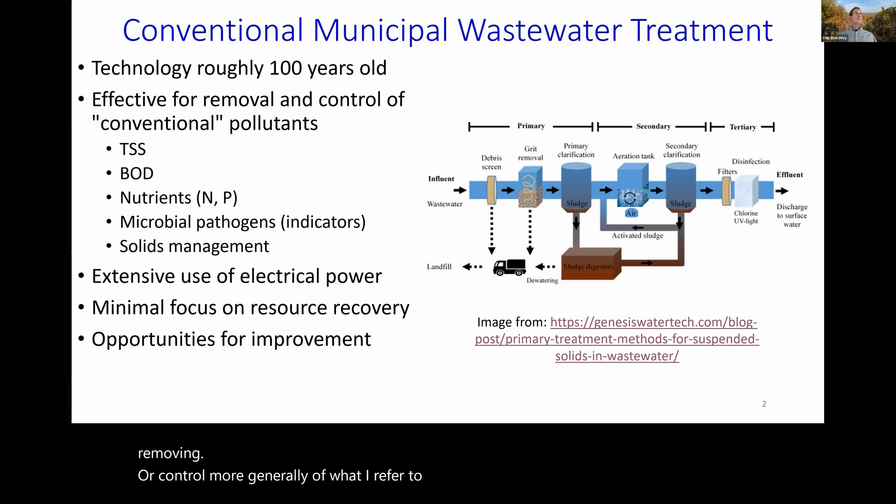Those include constituents that we quantify by total suspended solids or biochemical oxygen demand. They're also effective for control or removal of nutrients, especially nitrogen and phosphorus. They are effective for control of microbial pathogens, although we don't generally track pathogens, we track indicator organisms. And then lastly, if these systems are operated properly, they're effective for solids management. So these systems, as I said, are roughly a century old in terms of the technology that's used, and they are effective, as I've described.

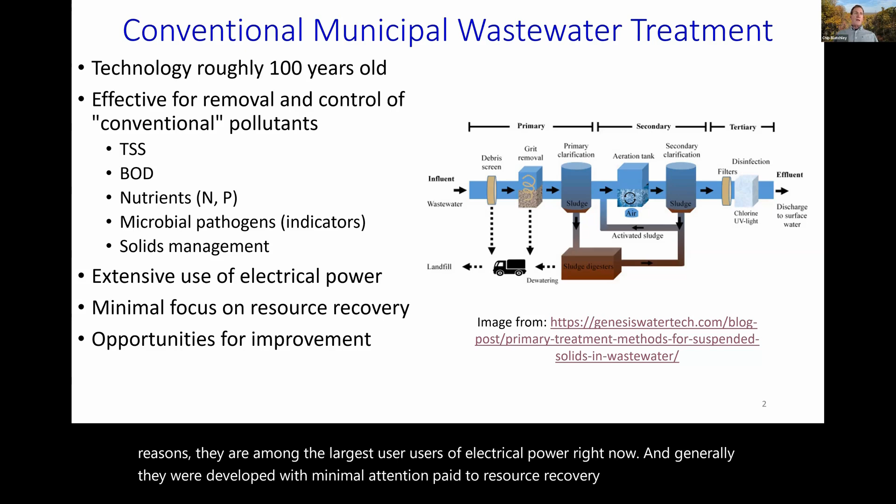However, they were developed at a time where focusing on electrical power consumption was really not a priority. And for that and other reasons, they are among the largest users of electrical power right now. And generally, they were developed with minimal attention paid to resource recovery, which suggests both of those things, that there's opportunities for improvement. So just in schematic form, this is really what we are looking forward to in terms of how these facilities are going to be operated in the future.

They will still have the requirements for control or removal of the conventional pollutants and perhaps others that I described on the previous slide, but they're going to be reconfigured to allow for a focus on resource recovery and reuse. And the resources where there are clear opportunities that can be taken advantage of here include energy. It is possible to develop these systems so that they are net positive in terms of energy rather than net negative. It's also possible to recover and reuse nutrients, especially nitrogen and phosphorus. But the focus of this presentation is going to be on recovery and reuse of water in a range of applications from irrigation all the way up to what's known as direct potabilization.

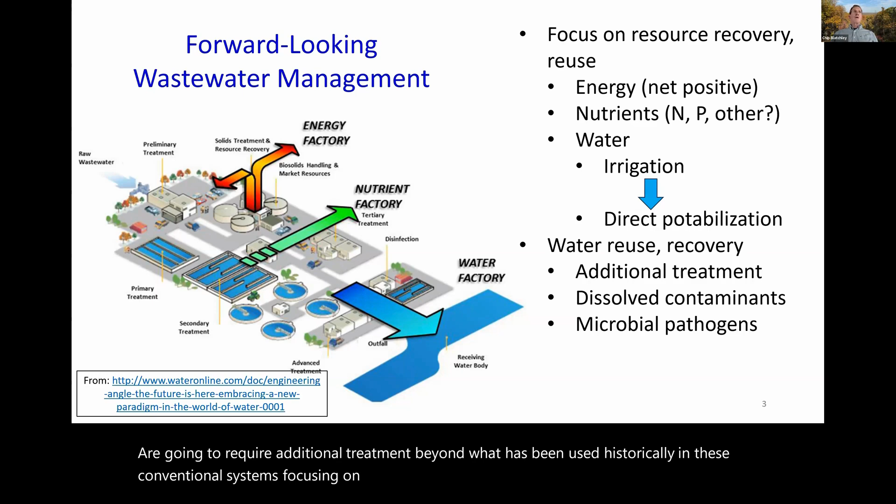So the water reuse and recovery opportunities are going to require additional treatment beyond what has been used historically in these conventional systems, focusing on dissolved contaminants largely and microbial pathogens. So the endpoint for treatment in almost all of these settings is going to be governed by some set of regulations. Somebody's going to tell you what you must do in terms of treating this water. So as an example, I've illustrated some of the requirements that are stipulated in Title 22 in California, which dictates how wastewater reuse is practiced in California.

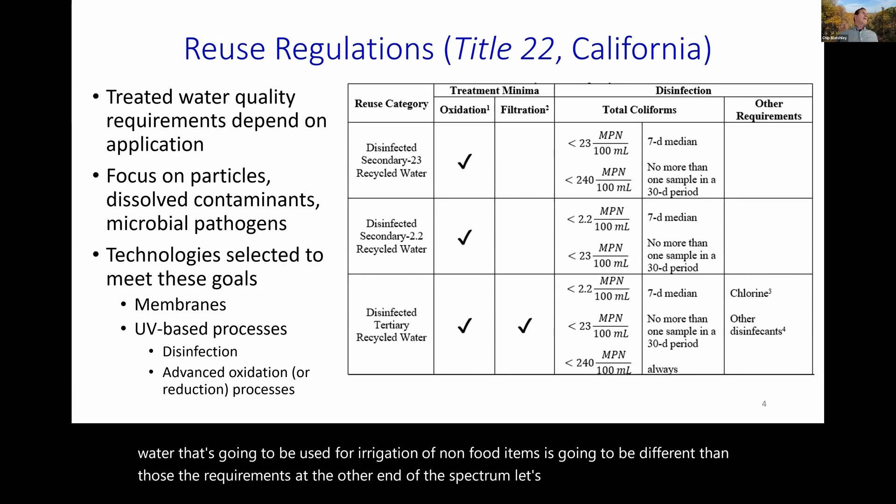So the treated water requirements are going to depend on the application. The requirements for water that's going to be used for irrigation of non-food items is going to be different than the requirements at the other end of the spectrum, let's say for direct potabilization. The focus of these requirements, as illustrated in this table, is on particles, dissolved contaminants, and microbial pathogens. And that's addressed, for example, in this column by the requirement for oxidation, which basically means the use of a biochemical process like activated sludge or something similar to address the dissolved constituents that are oxidizable.

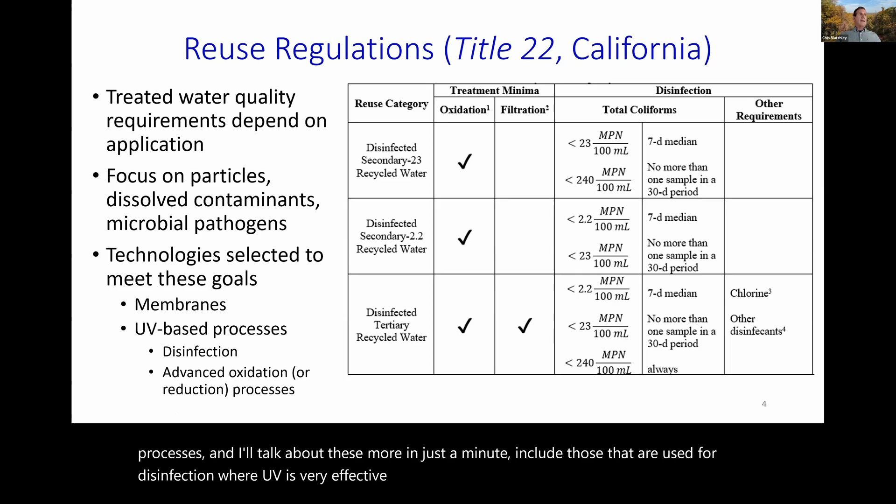There's also a requirement for solid separation in some of these settings, and that's defined in this filtration column. The last row in this column represents, at least in this table, the most severe requirements. And those would be the requirements applicable where the water has a larger likelihood of having human contact, either directly or indirectly. The technologies that are often, although not always, selected to meet these goals include membrane-based processes and UV-based processes. The UV-based processes, and I'll talk about these more in just a minute, include those that are used for disinfection, where UV is very effective, but also for advanced oxidation or advanced reduction processes.

Focusing specifically on ultraviolet disinfection, which is commonly used. Again, the extent of treatment or the amount of UV that needs to be used in a given setting depends on the intended use.

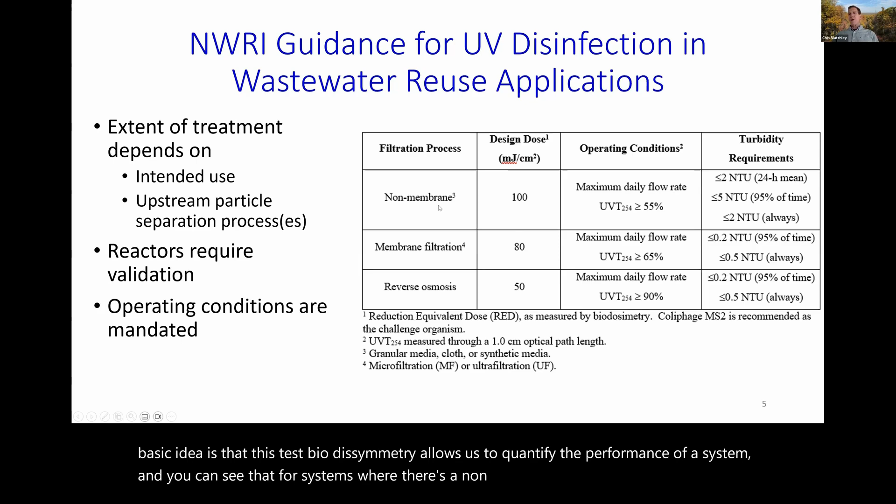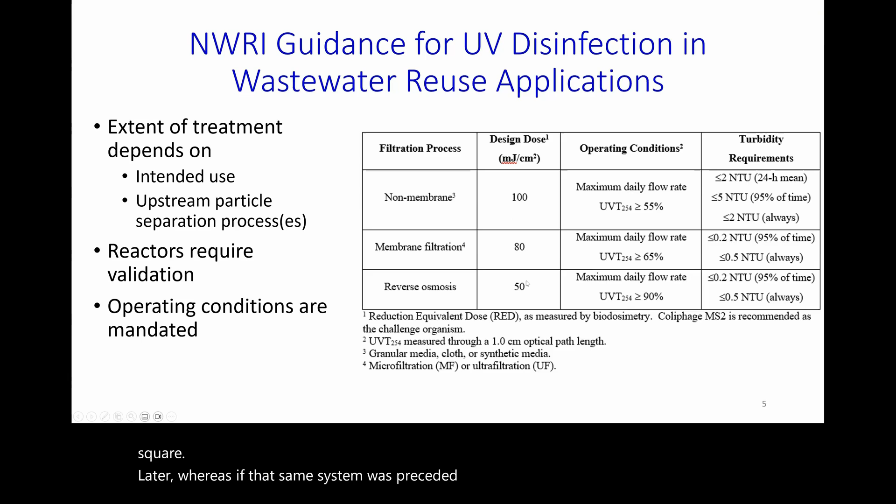You can see that for systems where there's a non-membrane filtration process, probably something like a sand filter that precedes it, the design dose would be 100 millijoules per square centimeter. Whereas if that same system was preceded by reverse osmosis, the requirement would be only 50 millijoules per square centimeter, roughly half.

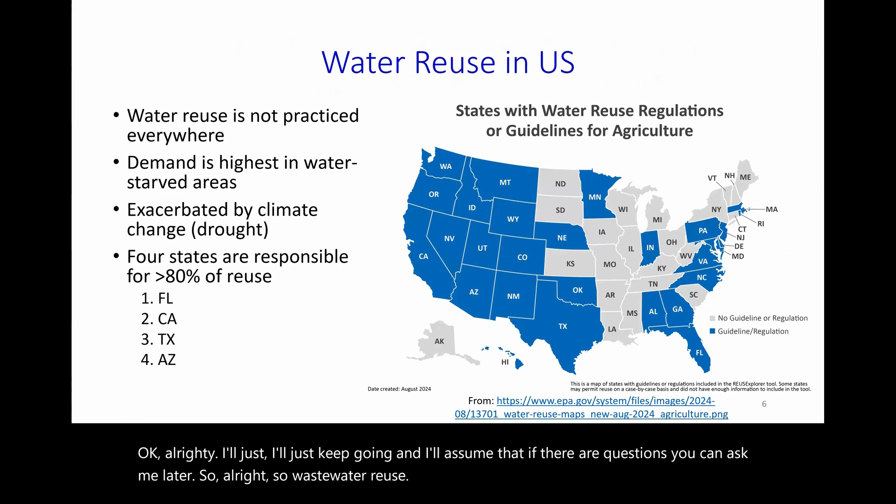Okay, thank you. So wastewater reuse is practiced broadly in the United States, although not all states are currently involved in wastewater reuse. The demand is, not surprisingly, highest in the water-starved areas of the country, and that demand has been exacerbated by climate change and in particular drought.

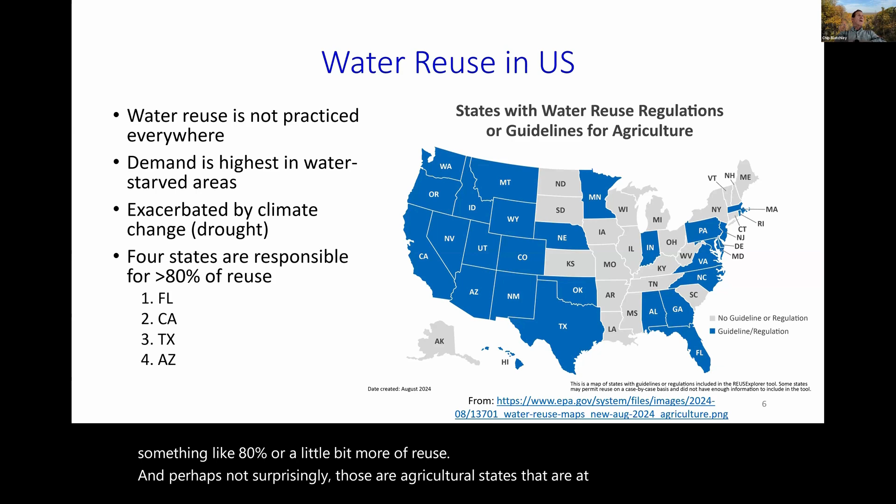Among the 50 states, there are 4 that are responsible for something like 80% or a little bit more of reuse. Perhaps not surprisingly, those are agricultural states that are, at least at times, water-starved, including Florida, California, Texas, and Arizona.

So I want to talk about a couple examples of wastewater reuse. This is a fairly extreme example that was implemented about 8 or 10 years ago in Wichita Falls, Texas. They experienced an extended drought that motivated them to pursue alternative sources of water. One of the most reliable sources of water, at least in terms of quantity, is wastewater.

So what they did was they implemented this pipeline, illustrated in the photo on the left, that transports their treated wastewater from their wastewater treatment facility to this other treatment facility, illustrated over here on the right, that includes membrane-based processes and UV-based processes.

That water is then discharged to a reservoir. That reservoir is the supply of water that's used for their potable water production facility. So that's an example of indirect potabilization, where they're basically augmenting an existing water supply with wastewater that's been treated to meet requirements that are stipulated and defined as being acceptable in the state of Texas.

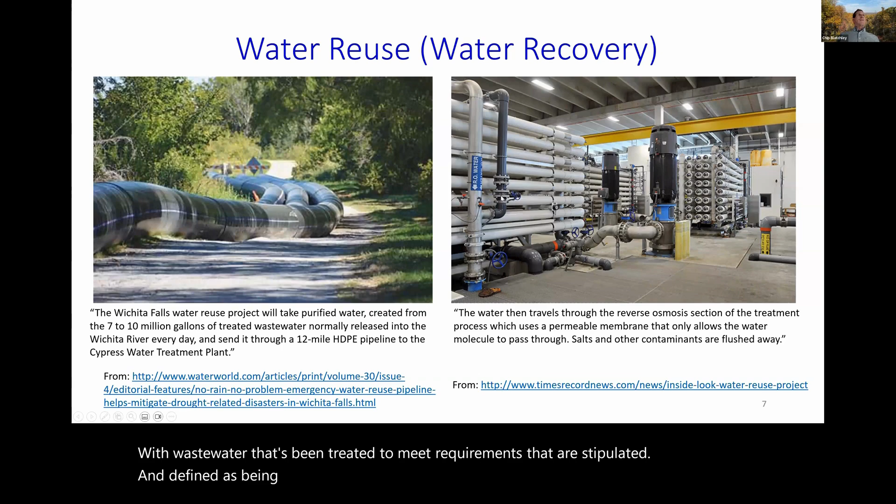In California, more recently, they have implemented direct potabilization. Direct potabilization is where a facility would treat wastewater, starting with wastewater and treating it to the point where the treated water could be directly injected into the water supply system.

This was motivated by an extended period of drought, especially in California but more broadly in the Southwest. Also, California and other water-starved states are experiencing increasing urbanization, with growing urban populations, as well as substantial demands for water use in agricultural settings. So the need exists to rely on water supplies that were previously viewed as unacceptable.

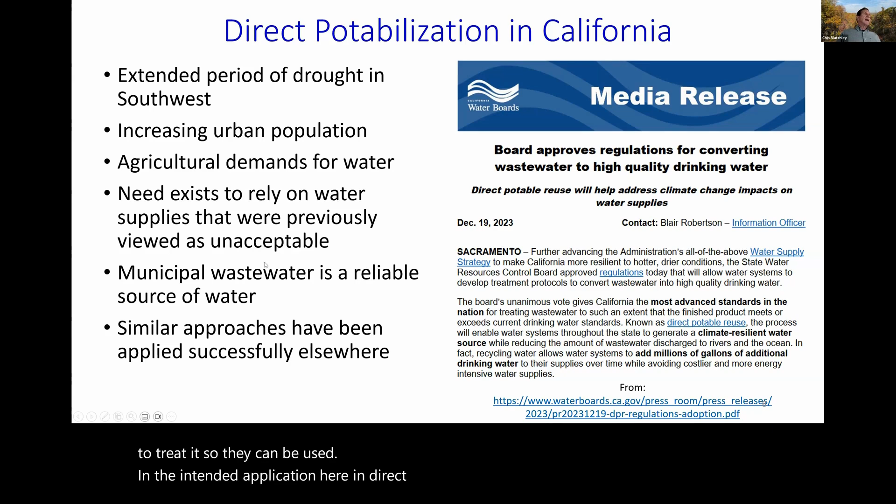Among those is wastewater. Municipal wastewater represents a reliable source of water, and the trick is to treat it so it can be used in the intended application here, direct potabilization. This is not unique to California; similar approaches have been applied successfully elsewhere.

Briefly, the membrane-based processes are described on this slide in schematic form. There's a range of pore size openings in the various membranes used in these settings, and a variety of separation mechanisms ranging from size exclusion to electrostatic separation. The basic idea is that these processes, depending on the membrane selected, can allow for very effective physical separation of large molecules and microorganisms.

Generally, these systems precede a disinfection system like UV. This image in the lower left illustrates the ability of various membranes to separate constituents from water.

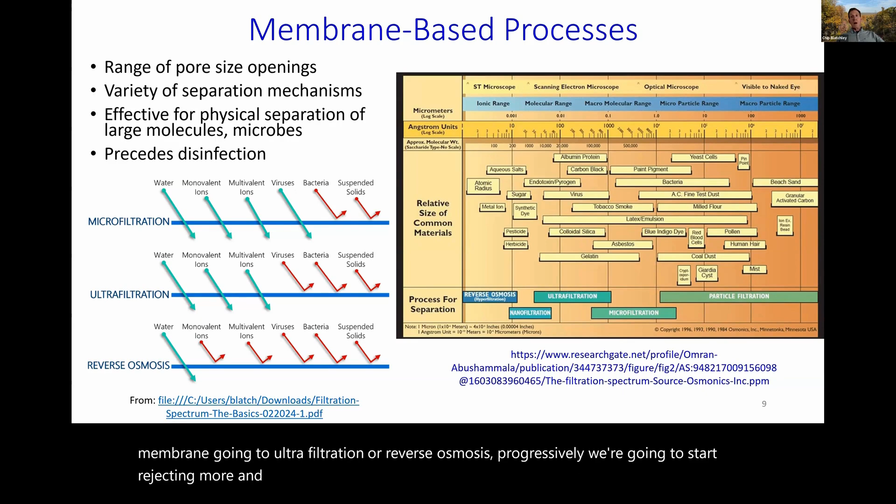A microfiltration membrane is relatively loose. It will allow for rejection of bacteria and suspended solids, but smaller particles like viruses or ions present in the system will pass through. If we tighten up the membrane going to ultrafiltration or reverse osmosis, progressively we start rejecting more and smaller constituents present in the water supply.

Disinfection requirements, like those for other forms of treatment, depend on the intended uses. Generally, the disinfection requirements become more stringent than those observed with conventional wastewater treatment, where you might be discharging the treated water to a receiving stream.

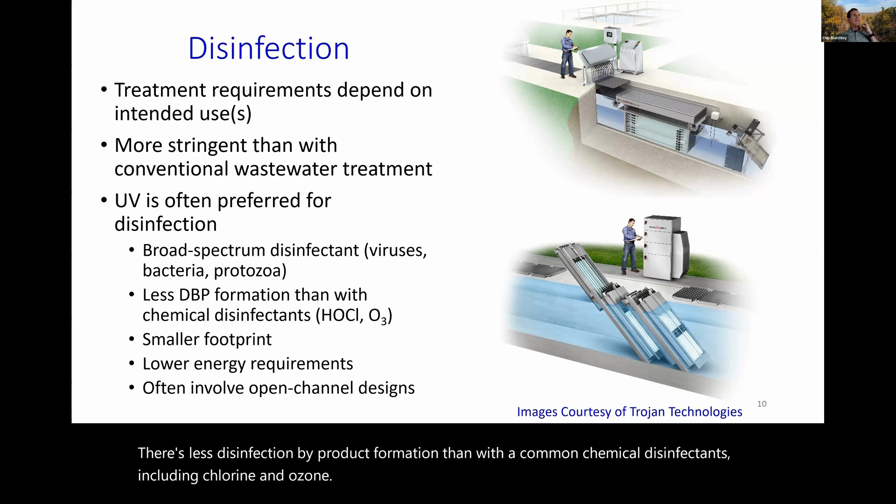For a number of reasons, UV is often the preferred mechanism for disinfection. It's a broad spectrum disinfectant, very effective against virtually all pathogens including viruses, bacteria, and protozoa. There's less disinfection byproduct formation than with common chemical disinfectants like chlorine and ozone. These systems have smaller footprints and lower energy requirements than chemical disinfection systems, and UV disinfection systems for wastewater treatment or reuse generally involve open channel designs, as illustrated in the images on the right.

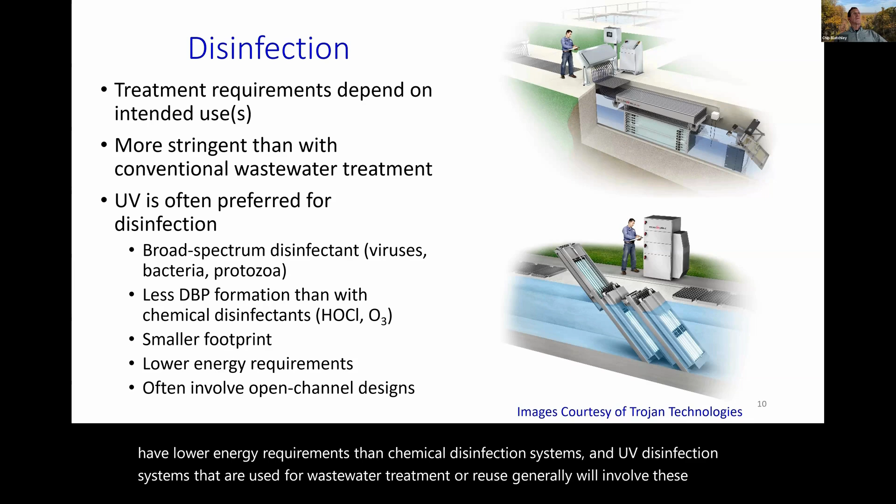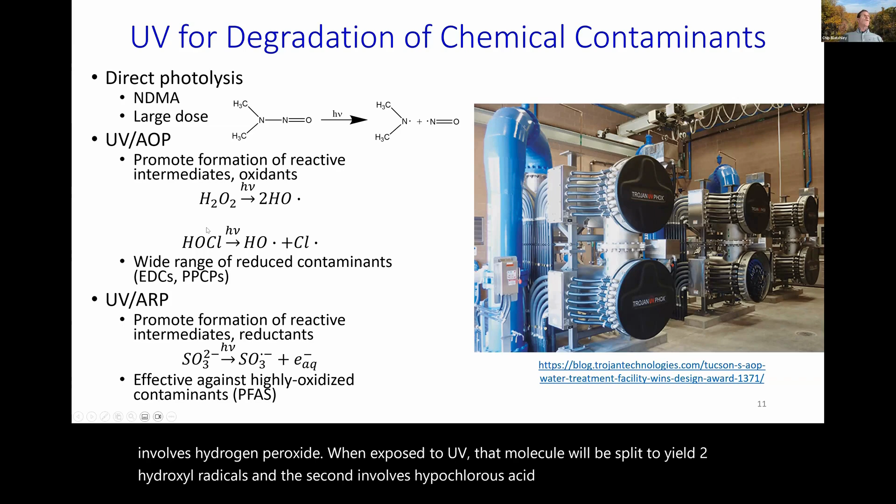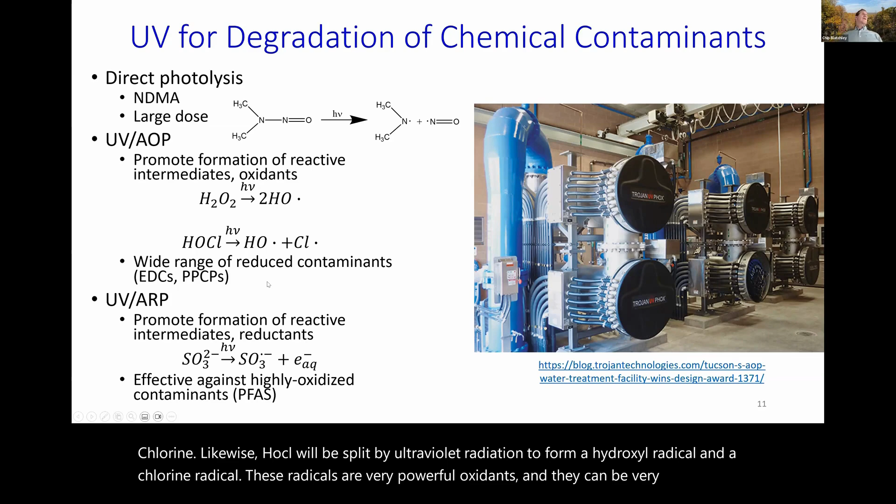UV can also be used to promote the formation of reactive intermediates, including reactive oxidants. Here I've illustrated two examples of UV advanced oxidation processes. The first involves hydrogen peroxide, which when exposed to UV is split to yield two hydroxyl radicals. The second involves hypochlorous acid, the most active form of chlorine; HOCl is split by ultraviolet radiation to form a hydroxyl radical and a chlorine radical. These radicals are very powerful oxidants and can be very effective for degradation of reduced contaminants, including endocrine disrupting compounds, pharmaceuticals, personal care products, and other constituents often of concern in wastewater reuse applications.

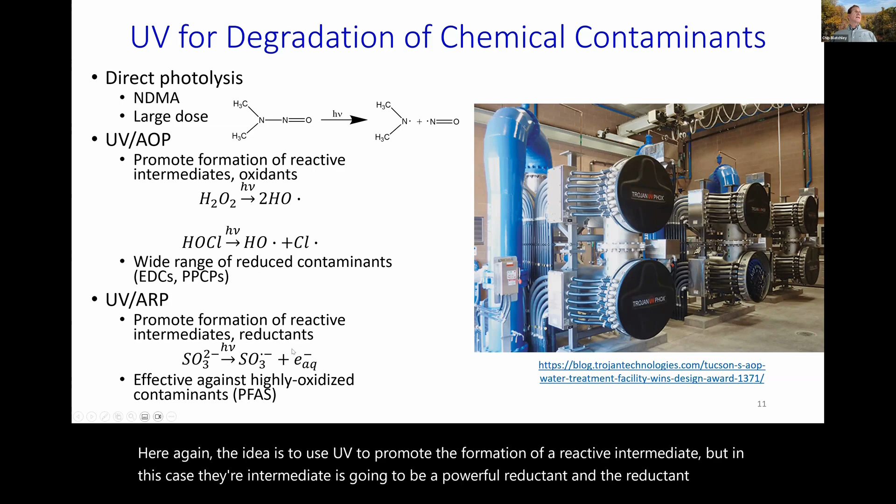Lastly, UV can also be used in what's known as an advanced reduction process. Here again the idea is to use UV to promote formation of a reactive intermediate, but in this case the intermediate is a powerful reductant. The reductant we specifically focus on in these ARP processes is the hydrated electron, the most powerful reducing agent, very effective against highly oxidized contaminants, notably including compounds in the category PFAS.

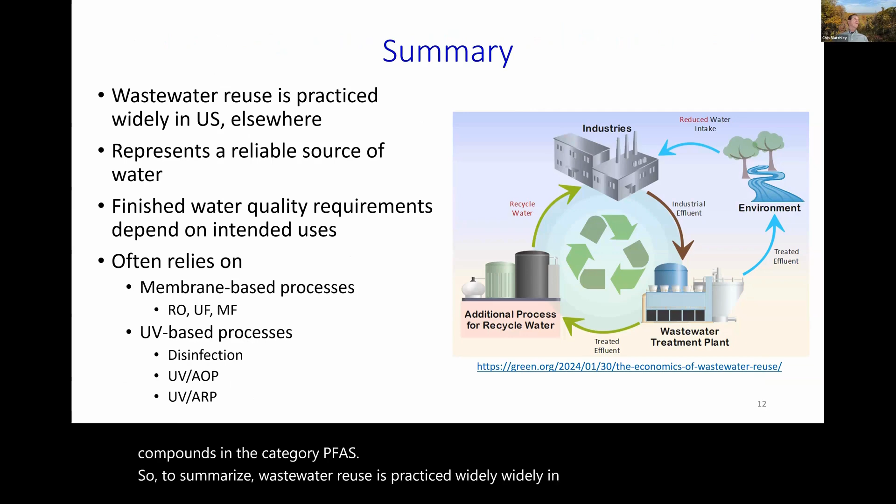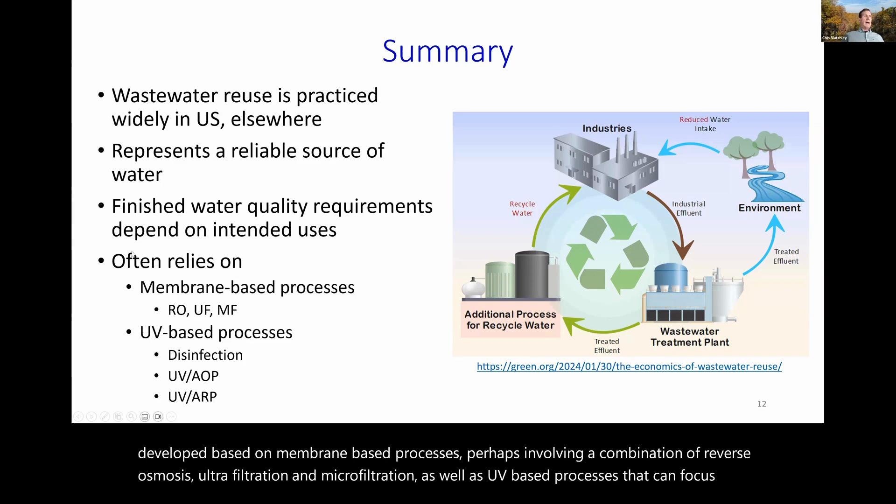To summarize, wastewater reuse is practiced widely in the United States and elsewhere. It represents a reliable source of water that can augment existing water supplies. The finished water quality requirements depend on the intended uses, and these systems are often developed based on membrane-based processes, perhaps involving a combination of reverse osmosis, ultrafiltration, and microfiltration, as well as UV-based processes that can focus on disinfection, oxidation, reduction, or a combination.

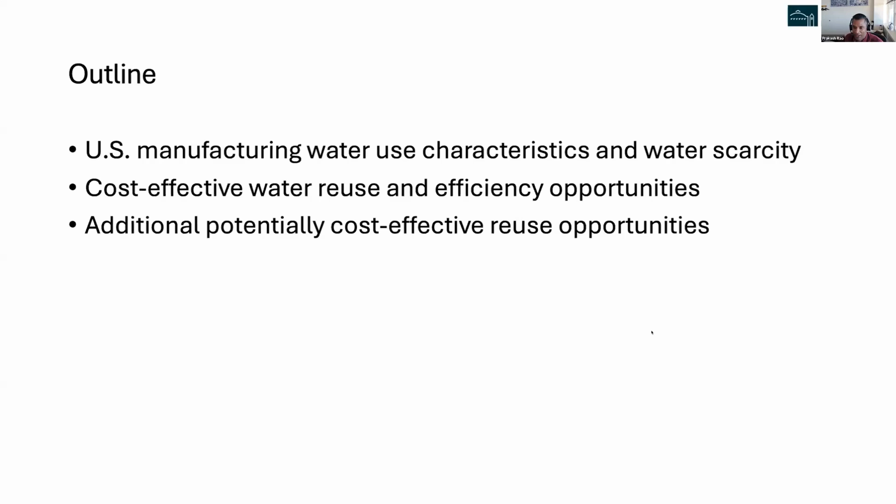So brief outline of the talk here. I thought it'd be helpful to talk a little bit about how our manufacturers use water, and close that out with a conversation on water scarcity and how that's a motivator for some of the actions we see manufacturers taking. Then we'll talk about some cost-effective water reuse and efficiency opportunities in manufacturing, and then segue into some additional potentially cost-effective reuse opportunities that are seemingly difficult, but when you look at what manufacturers already do and the complex systems they already deal with, it could be easier than we think.

So let's start with how manufacturers in the United States use water. This is from the United States Geological Survey. Every 5 years, I believe, they release data on water use in the United States. The newest data should be coming out pretty soon, but for the time being we're in the waning days of the old data set, which goes back to 2015. It tells us that the United States withdrew 322 billion gallons per day of water for all purposes.

Manufacturing specifically was about 20 billion gallons per day, representing about 6% of all water withdrawn daily in the United States for manufacturing purposes. If we look at the circle charts on the right, of that 19.7 billion gallons per day going to manufacturers, where is it coming from? The vast majority of manufacturing water supply is self-supplied resources - their rivers, lakes, groundwater resources - they've gained permits and are allowed to draw directly. So 60% of manufacturing water is from surface water resources and 15% from groundwater, with the remaining 25% from domestic municipal water plants. Some of it is saline water, but the vast majority of the 19.7 billion gallons is fresh water.

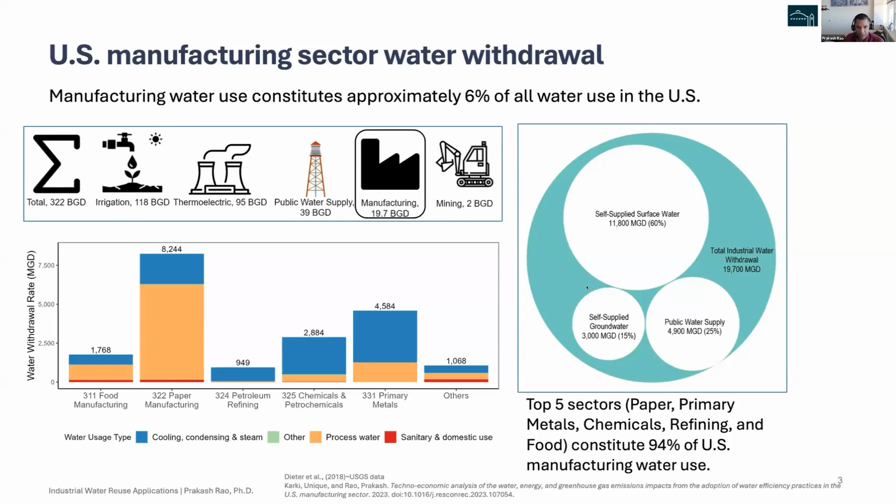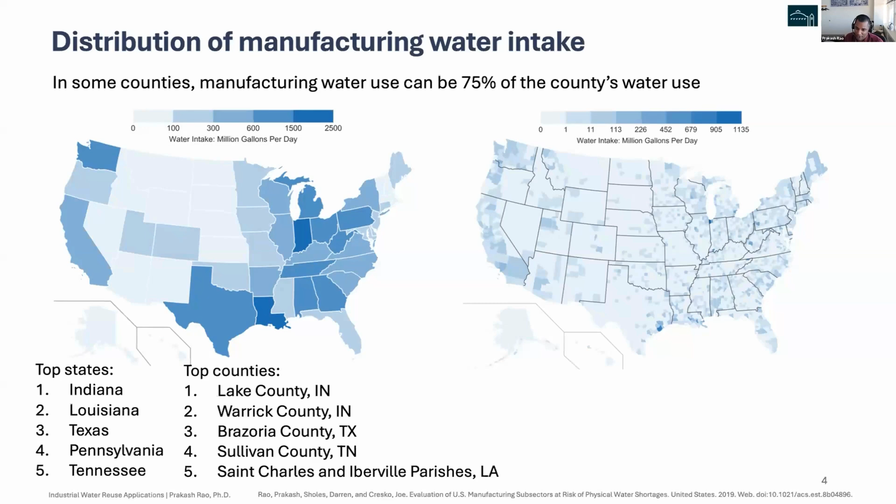Similarly, in Texas, it's not West Texas. It's specifically Brazoria County, where there's folks like Dow and some of the other petrochem industries, and you see that in the data. So in these counties, it can be as much as 75% of the county's water use—6% nationally, 75% in some counties—which gets to the importance of regionality in water use, right?

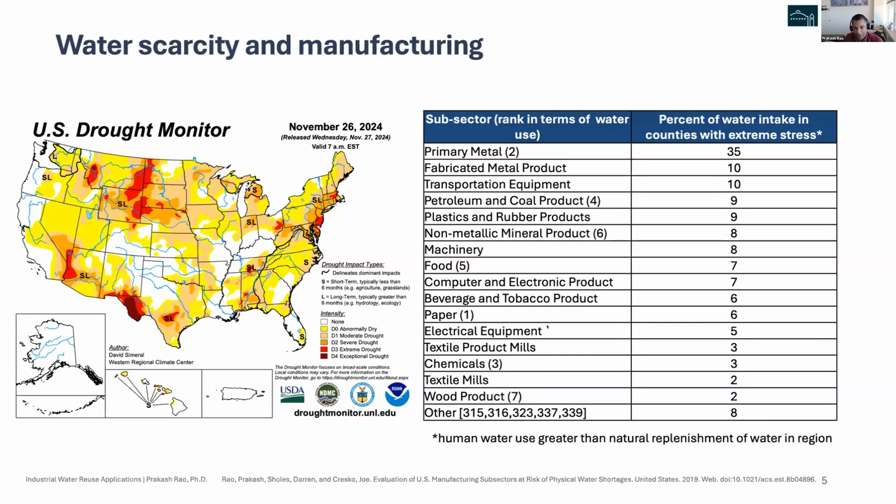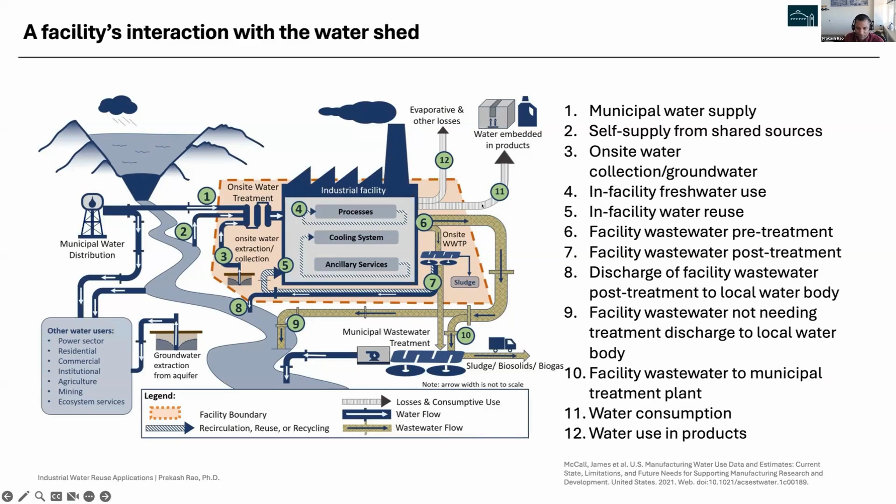Now, if we think about how manufacturers use water, recognizing that scarcity can often be a driver for water efficiency or water management practices, what are our best options for hardening our supplies, adding more supplies for our manufacturers, so that if there is a drought, they're well covered? There's redundancy. We looked at some of the most common options, aligning with what others have found as well.

Really, if you think about water efficiency and reuse as an additional water supply option, just like if you dug a lake and started collecting rainwater, it is by far the cheapest option from our analysis compared to anything else you could do. In our analysis, we looked at something called the levelized cost of water, where we looked at if you're going to do a water intervention, maybe from building a desal plant, to an efficiency measure or a reuse measure.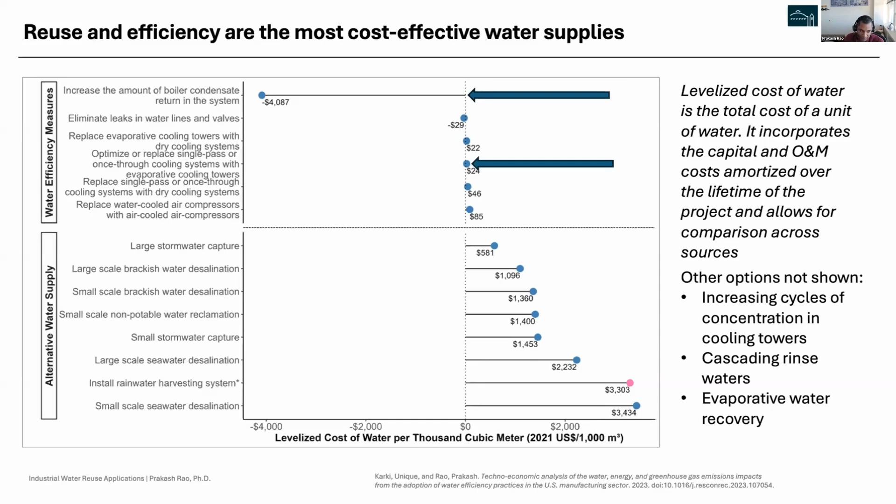I'll push through here. So, deeper look at water reuse. Those are some of the simple options. We also looked at, as you noticed, many manufacturers do treat their own wastewater and then oftentimes dispose of it back into the river or the lake where they got it from. We looked at those discharge permits and we looked at the water quality requirements for their production processes.

And one thing you see is a lot of manufacturers are actually already treating waters to levels sufficient for their processes. So I want to harp on the primary metals industry right here, largely because of how representative it is in Indiana. We've indexed things. So if you're below 1, that means the water you're discharging to the river is sufficient in water quality along the constituents we looked at to be reused in your processes. If it's above 1, that means it needs further treatment.

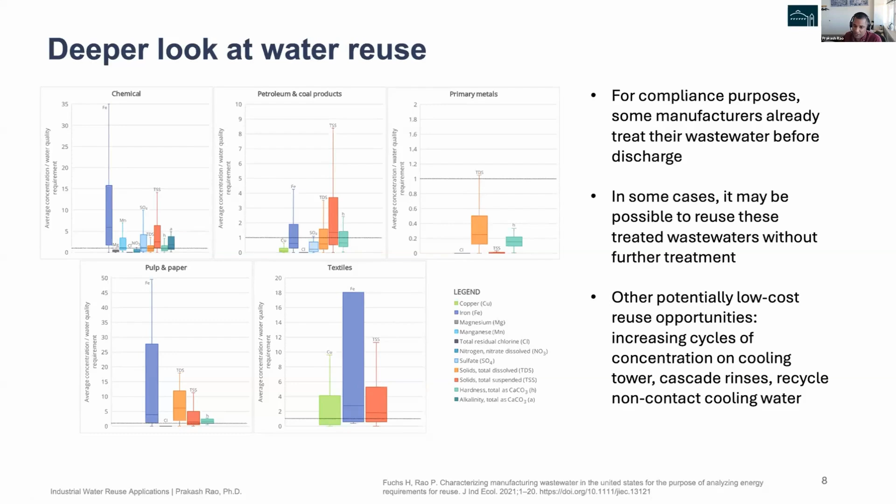But as you can see on chlorine, total dissolved solids, total suspended solids, and hardness, as represented by calcium carbonate, waters are being treated to sufficient qualities already for reuse. So the suggestion here is that some of the complex water reuse options might not be so complex; manufacturers might be already doing the hard work of treating it back to levels that they can reuse it.

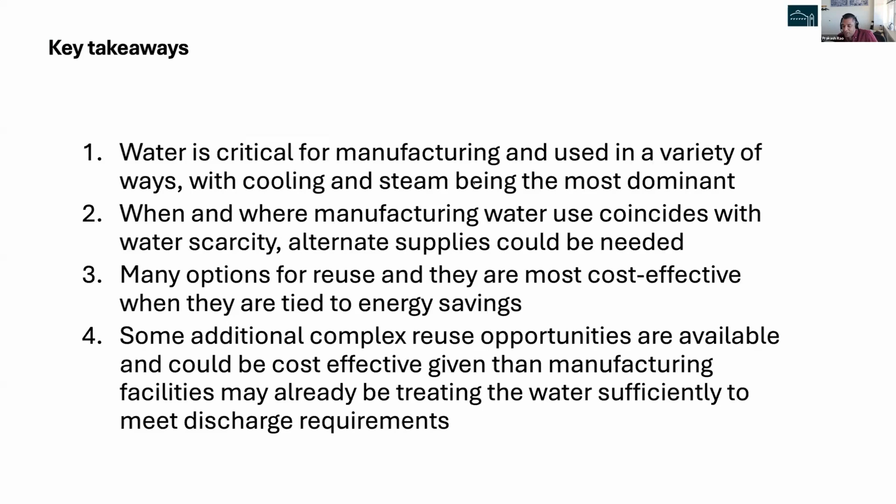So just to close up, sorry for going over here, but water is critical in manufacturing, used in a lot of ways. Cooling and steam are the largest users. Where manufacturing coincides with scarcity, alternate supplies could be needed, and the most cost-effective are reuse and efficiency. And some of the more complex opportunities may not be so complex when you think about what manufacturers are already doing and the systems they handle.

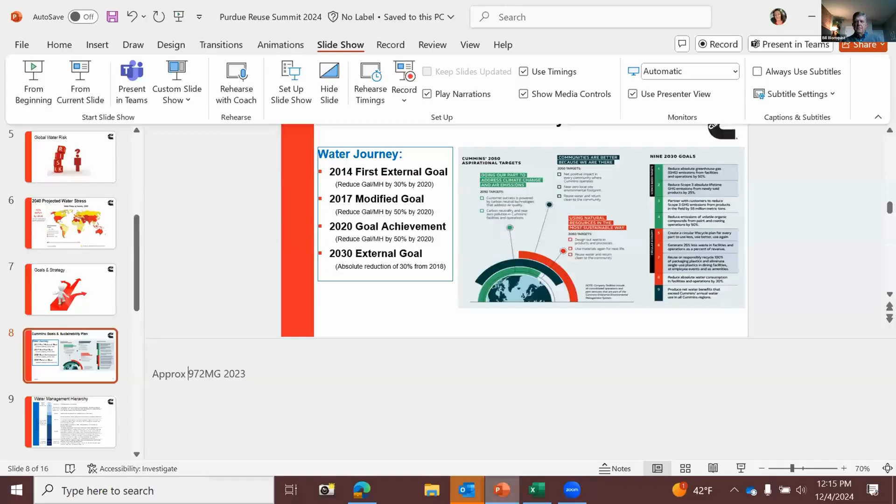All right, so I'm going to go through a little background for Cummins. I've been with Cummins for 24 years, always in the environmental role. We'll go through the first part of this pretty quickly because it was covered very well by the previous two panelists. But our founder believed that in order for us to be sustainable and prosperous, we had to work with our community. It's part of our core relationship with our community to be a sustainable citizen and be responsible. And we understand that when we're looking at all of the different intricacies of manufacturing, natural resources are in the core, and they link everything together. And if we don't have sustainable resources, we're not going to be able to be prosperous and sustain.

So we started looking at this a long time ago, and we started looking at risk.

There's a question I see. Oh. Mary, your hand's up. Did you mean to have your hand up, Mary Atkins? If you meant to have your hand up, please go ahead and ask your question. If you didn't, there's a lower hand button that you'll see at the bottom of your screen. Okay, I'll continue and we'll see.

Yeah, please go ahead. Okay, so we started looking at water risk back in 2007 and earlier. We started having issues at some of our sites with droughts and not having enough water. And so we looked at how we could set goals and what we needed to do. And so we started tracking water stress across the country and across the world.

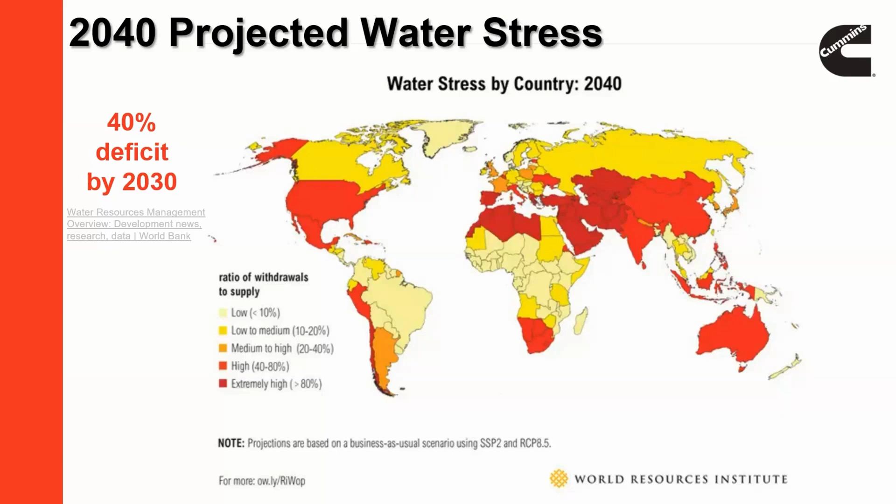When you look at the data, it's suggested that by 2030 there's going to be a 40% water deficit, meaning we're extracting 40% more water than we're replacing. So we were wondering how we could get ahead of that, and we started looking at what our goals and strategy were.

We set our first external goal in 2014: to reduce our gallons per man hour by 30% by 2020. As we started looking at water—since energy had been our primary focus before, not water—we started metering and understanding more where our water use was coming from, looking at water balances across our facilities, and we noticed we had a lot of easy things we could do.

In 2017, we had already exceeded our goal, so we modified it to a 50% normalized reduction. Then 2020 came and we achieved our goal—we actually hit a 53% reduction in gallons per man hour.

In the meantime, during 2018-2019, we were working through what our new target would be since we were already coming upon 2020. We were looking for 2030 goals, and we decided to shift to a more science-based target: an absolute reduction of water consumption of 30% from our 2018 baseline, trying to get ahead of that 40% deficit.

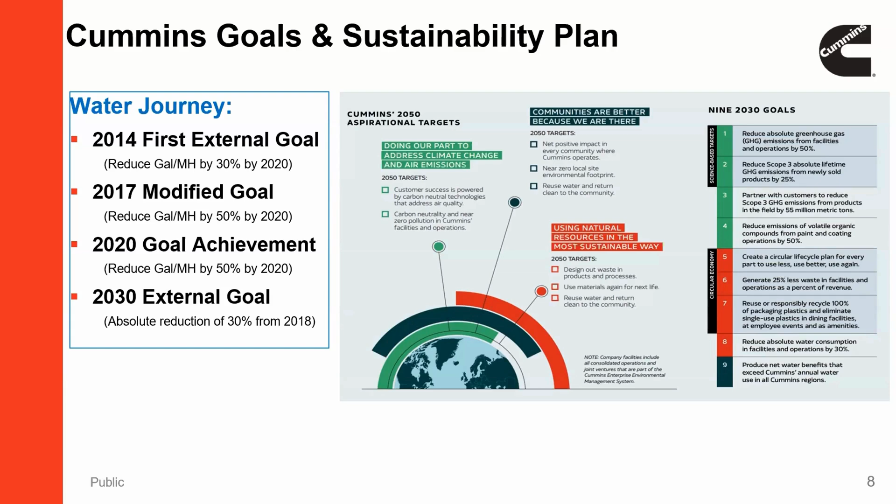Another portion of our company works on corporate responsibility, and they work on water neutrality projects where we provide water to the community. That program has already exceeded our total consumption as a company, so we provide more water globally than we use globally. Now we're looking at doing that at a more regional level—that's where we assumed we already had 10% covered, and we'd cover the other 30% through our own facilities and manufacturing.

So we developed a water hierarchy that we deploy for how we choose to manage water. You'll notice my terminology differs from the previous panelist a little, because we had to differentiate between reuse and recycle. Reuse to us is when we recirculate water within the same process, with or without treatment—like recirculating in a cooling tower, going through staged wash tanks, or filtering it, but it's going back into the same system.

Recycling to us is when we recycle water into another process—for instance, we take wastewater, clean it up, and use it for toilet flushing, or for cooling towers, or whatever.

If you look up a couple more rows in the hierarchy, there's what we call an alternative—an alternative water source that's not fresh water. This is where we focus on capture of condensate, boiler blowdowns, or anything from our systems that already has a high quality of water we can use without treatment, just as an alternate source.

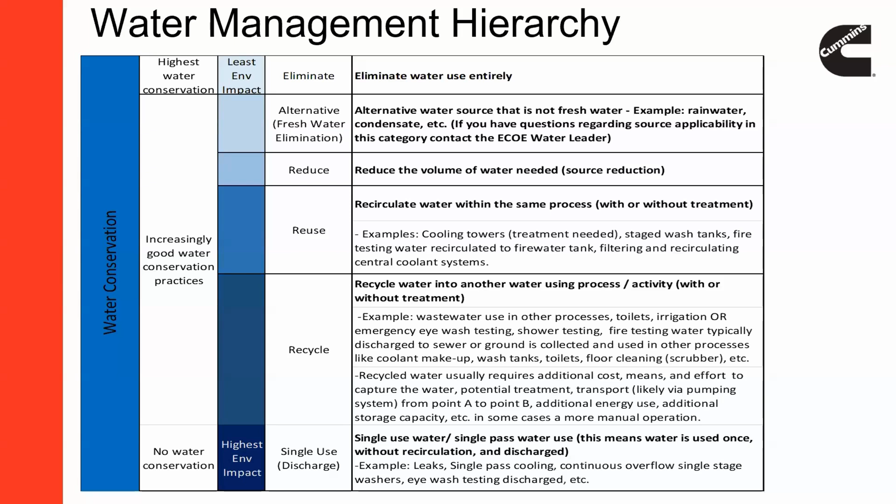So what I'm really going to focus on is just what we call recycle, which is reuse of wastewater. And we're trying to push more for reuse at the source, because it's usually cheaper, easier, and it usually helps the quality of the process also.

So, wastewater recycling in practice. We currently have 15 sites that report that they reuse wastewater. This means they either already had a wastewater treatment facility, or some sort of treatment where it was a commingled mixture of wastewater coming to a facility, being treated and discharged to a municipality or third party source. So we looked at how can we use this water, because it's a constant supply, and in many cases it's already at a quality where we can reuse it in a particular process.

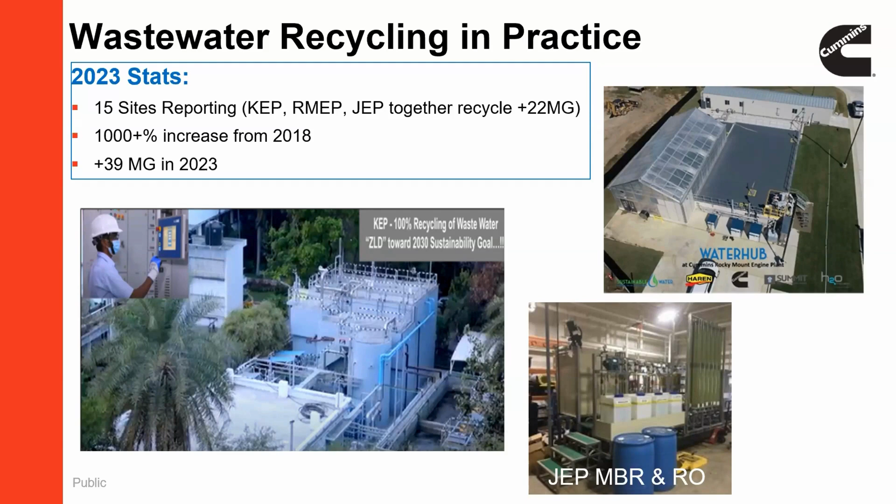When we set our goals in 2018 for 2030, we set three critical focus areas: irrigation, fire system protection water recycling, and wastewater reuse or recycling. Three of our large manufacturing facilities, pictured here, have the largest footprints and are recycling over 22 million gallons per year of wastewater that goes back into their processes. The increase from 2018 is 1,000%. In total, those 15 facilities together achieved more than 39 million gallons of reuse in 2023.

The first one I'll talk about is KEP, the Kothrud Engine Plant in India. They are the largest reuse facility at over 8 million gallons, with 100% recycling of their wastewater. All of our India facilities have a zero liquid discharge goal by 2030, so all our India facilities will be recycling 100% of their wastewater. The ETP and STP are their terms for effluent treatment plant, meaning industrial treatment, and sanitary treatment plant - so they're actually recycling both. They already had an existing system with equalization tanks and an aeration system, a typical treatment setup, and then we added an ultrafiltration system to meet the quality needed in manufacturing.

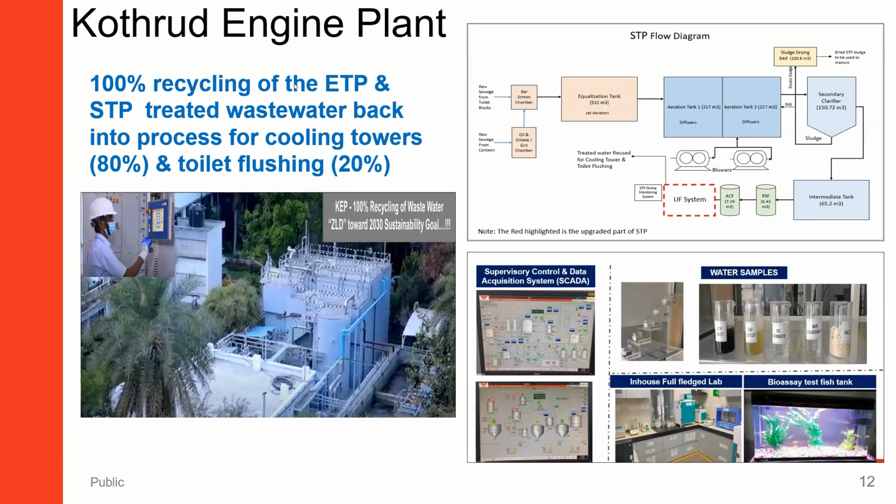All of the reuse is in non-contact manufacturing processes, so there's no public contact and no need for disinfection. But it still goes through an intense ultrafiltration process, and they're really proud of it - they even have a little bioassay fish tank to show how clean their wastewater is. They're reusing about 8 million gallons a year from that system.

By the way, Cummins uses 972 million gallons per year globally of water.

This particular project is in Rocky Mount, North Carolina - it's a water hub using a different type of process. The previous plant had an industrial system that was mainly physical-chemical separation, followed by a typical aeration basin system like you'd see in a municipality. In place of the aeration system, they've now installed this water hub, which uses a chamber of membrane material underneath the building that allows for densely packed root growth as well as biological growth on that membrane. Through hydroponics and bacterial treatment, it gets the same treatment as their old aeration basin - actually better. It then goes through a series of filtration and reverse osmosis before being reused.

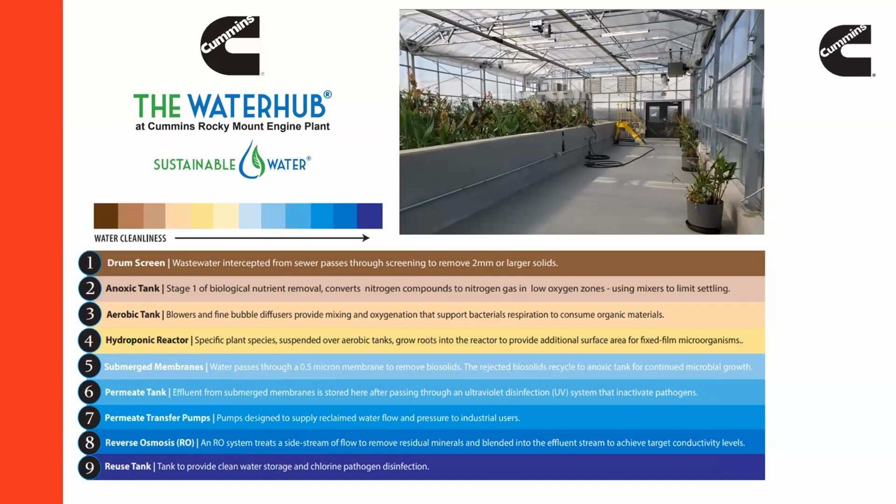They're at a little over 7 million gallons a year of reuse, currently reusing about 70% of their wastewater. It's all used in their cooling tower, which is the largest load on the facility. This facility had already previously installed condensation capture, so this was the next step for them. They have the capacity to go up to about 10 million gallons with this system.

This one is in Jamestown, New York - an engine plant with a similar system. They had a typical aeration basin, which they kept, and then added a membrane bioreactor, reverse osmosis canisters, and ceramic membrane ultrafiltration. Now they're at about 7 million gallons annually, and this facility is capable of 12 million gallons. They reuse the majority of it in processes - the same non-contact approach. We don't have any reuse right now in employee contact processes; everything is in a non-contact form.

These are the two largest implementations we have in the United States. As I said previously, India has several coming online now, and we're seeing the ability in China to actually purchase non-potable water from the utility. We haven't started that process yet - we'd prefer to implement it within our facilities first. But that's an alternative for us, to purchase it from the utility in China as well.

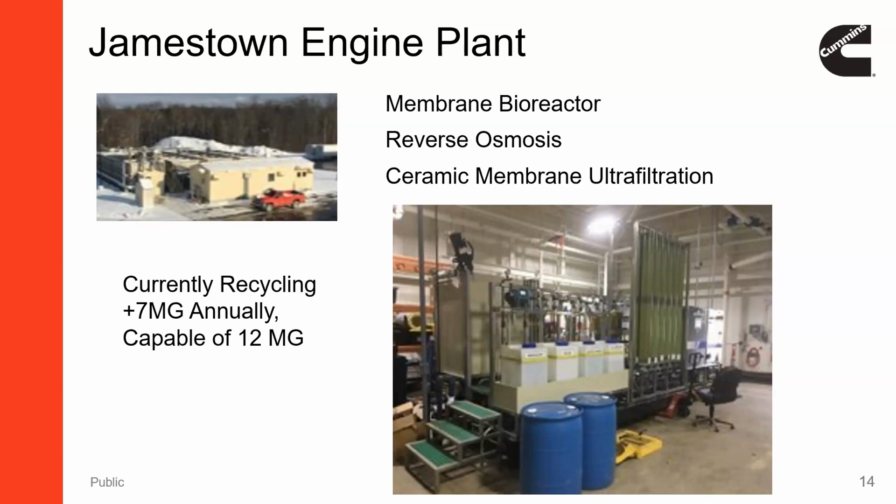So, things that we learned.

Submetering is a wonderful enabler. You can't fix something if you can't measure it and you don't see it. So submetering is a great thing to get established up front. Understanding all your regulatory requirements up front before you start the process, so you know exactly what you need to do.

Prior consultation with the local utility is beneficial, not only from a community service standpoint, but also because in some cases our facilities are the largest consumer of water for a utility, and migrating to another source can potentially harm the utility in terms of profit. So we've found it's better to talk to them up front, explain what we're doing, and get buy-in at the beginning. And if there's anything we need to do to help them, we can do that as well.

And this next one is very important: understand what your true water quality needs are in all of your processes. Because if you don't know what your quality needs are, you might assume you need potable water in a machining line or in a washer, and that may not necessarily be true. This takes a lot of work to really understand what that quality need is in your process. So understand that up front. That tells you how far you have to go in your treatment process, and it also highlights areas where you can reuse water just as it is.

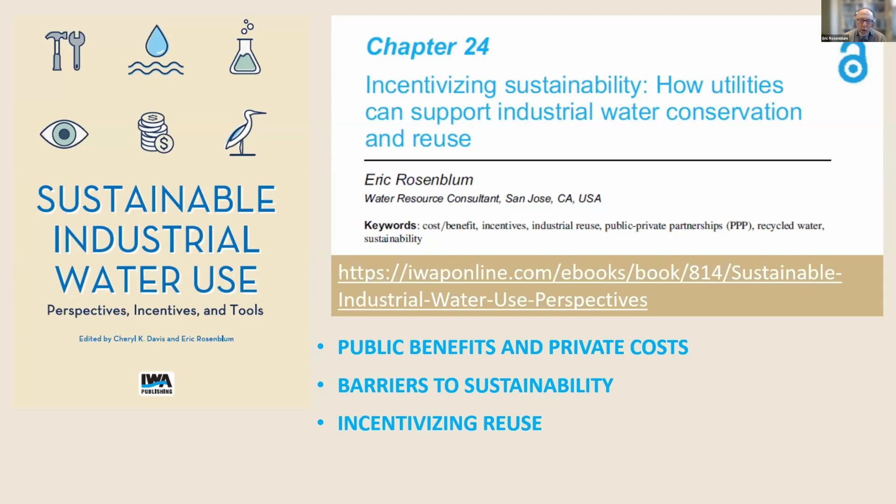Terrific. So Dr. Blomquist asked me to essentially summarize a chapter in a book that we published in 2021 called Sustainable Industrial Water Use: Perspectives, Incentives, and Tools, in which I drew on my experience as the former manager of a water recycling utility in Silicon Valley to talk about how utilities can support the desire of companies to use water more responsibly, looking at the distinction between the public benefits and the private costs, the barriers to sustainability, and how we can incentivize reuse.

Before I dive into that, though, I wanted to give a little bit of background. The book that we published, we did in part because we recognize that while there's all kinds of great technology available for producing water, for recycling or treating wastewater to remove the pollutants, what we lacked really was the political will and sufficient collaboration amongst all the parties.

What I mean by that is we recognize that industrial water use in particular is not solely the responsibility of the companies. While there are examples like Cummins of companies that take their social responsibility very seriously and invest in improvements to their water use, the fact is that it takes everybody working together to make that happen — not just the industry, but the utilities, the government policymakers, the banks, the financing institutions, the NGOs, and even the public as consumers of the products. And they all have an important role to play.

So we wanted to highlight that. And you'll notice that the book includes articles from 60 researchers and practitioners and NGOs around the world to talk about their role in that. It's available online, by the way, as open access.

The other thing I wanted to share from the book was that my colleague Cheryl Davis identified 4 different types of companies. The early adopters — and certainly we'd see Cummins in that group — who see the long-term benefits of sustainable water practices; they have both the resources and the will to invest in water reuse. The potential adopters are those for whom this is an attractive proposition, but they really need to see the business case and they have to have financial incentives.

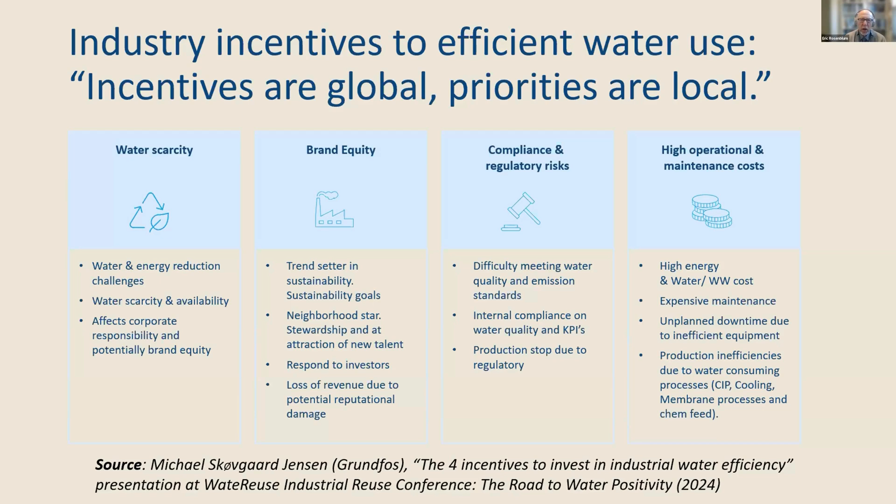Of course, there's always the floor, if you will, of regulatory risk, the need to comply. And then finally, just the cost of water itself can sometimes be a motivator. But any one of these at any one time may not be sufficient to get a company to make the kind of investment they need in water recycling.

So the examples I'm going to provide come from the experience I had of managing the South Bay Water Recycling, which was a non-potable water system in the Silicon Valley area of Northern California. We eventually hooked up almost 1,000 different customers. About 10% of them were industrial customers.

And of those customers, though, I think they use somewhere between 40 and 50% of the water, in part, as I think Dr. Rao mentioned, that the water use in industry tends to be more constant, whereas irrigation customers use water only in the summer, or when they need the water, and it's quite seasonal in nature.

I think another thing we learned when we went out to the customers, it's interesting, there was a transition in the early stages. We went to companies like Intel and said, you can use our recycled water in place of your makeup water from potable, and you treat it anyway, so you can save $100,000 a year. And they responded by saying, well, that's great, but we have a system in place now, and if our line goes down, we lose $1 million a day.

So the perspective of industry relative to their processes are really very different than the public sector. There's a very fierce protectiveness of the companies towards their profitability, an instinctive avoidance of risk without reward, and a deep-rooted suspicion of government, all of which comes into play.

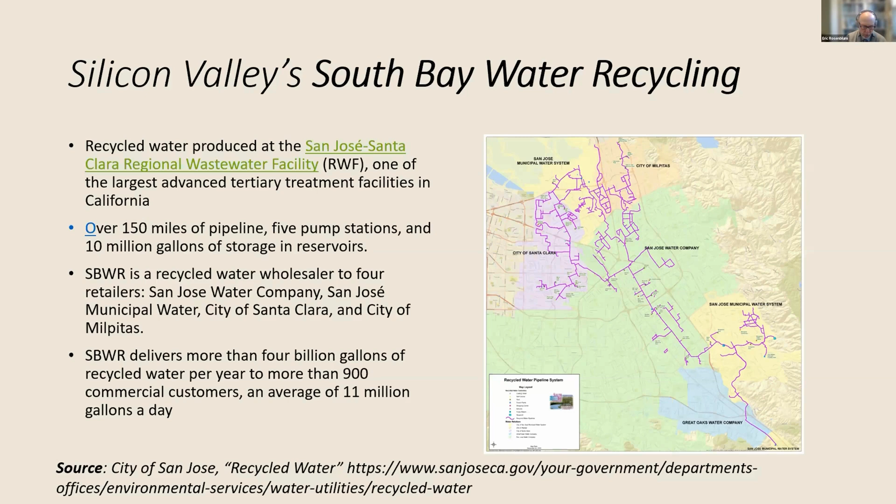The way utilities can respond to that is by helping to defray any costs associated with connecting to a recycled water system, being very clear about the risks and the benefits, and then being good partners to industries and providing timely communication and such.

There was a report done by the WateReuse Research Foundation about 10 years ago, looking historically at the use of recycled water by industry, in which they looked at some of the cultural differences between the companies and the utilities. For example, companies are looking to achieve profitability, and they're looking at cost benefit. The water providers, the public sector agencies, tend to focus really on their core responsibilities in terms of social benefits, and their time scales are usually much longer.

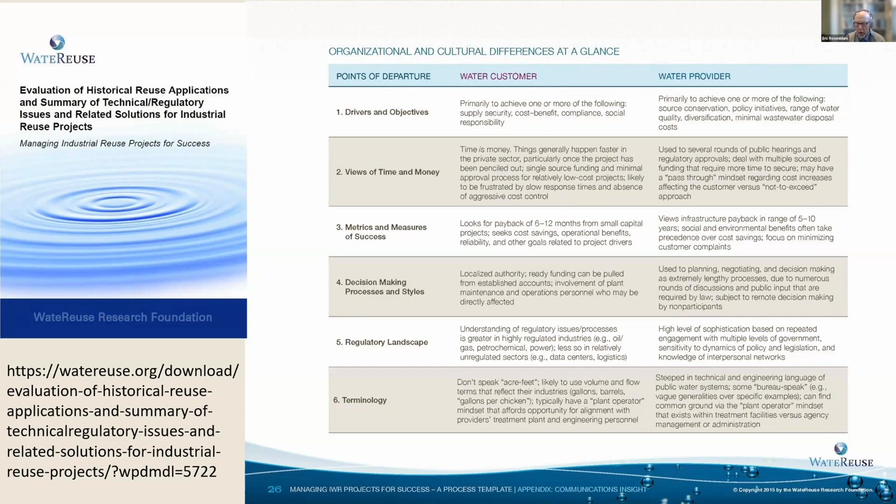They say that when the industry is looking at their watch, the utility is looking at the calendar. So they really need to be more focused on the timeliness aspect. There are also different measurements of success, like payback periods. Again, all this information is in the chapter, and I would encourage you to look at the book.

The ways industries can be supported by utilities, in effect, it really addresses the cost. It's costly to connect to recycled water. You have to build a pipeline. You have to change, if you're using non-potable water, the different systems have to be separated. There has to be backflow prevention. Sometimes chemical and operational treatments have to be changed.

Utilities can support this change by underwriting the costs of connection and retrofits. Sometimes the discount of recycled water can be enough to attract the initial interest of companies. Other times that discount can actually be amortized into the cost of the construction. There's all kinds of financial strategies that can be used to make this more attractive.

When it comes to the chemical treatment changes, I know we actually offered expert cooling tower technical folks to the companies to help them manage any changes to the chemical treatment from the quality of the water from the non-potable system. And with respect to the fact of having to shut down to make certain changes, it's important to acknowledge that there are risks to not using recycled water, in the sense that, especially in water short areas, recycled water can sometimes be a much more secure supply.

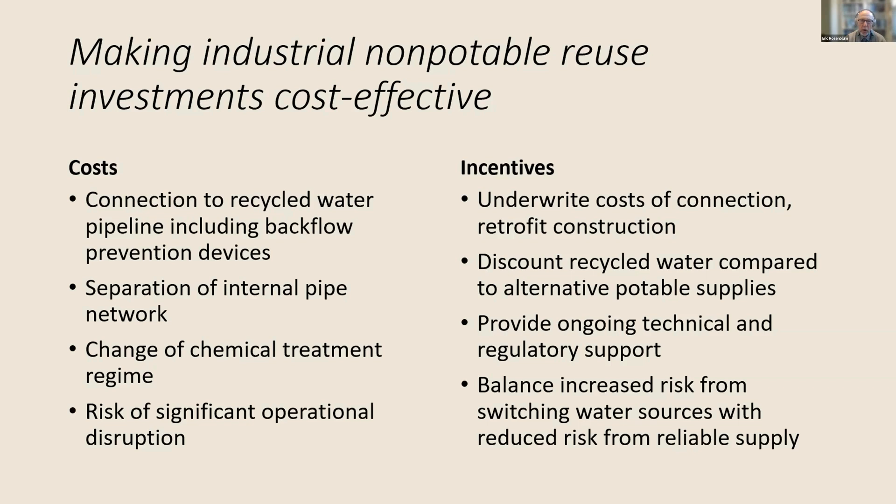And I know in California, we'd ask companies, what's the cost if you have to reduce your water use by 20%? And then what's the likelihood that might happen in the next 10 years? Virtually no one said that there was no likelihood. So there are ways to frame the issue where you can monetize some of the benefits of recycled water that might not be immediately obvious.

Another way to look at this, this is also in the book, there's a charter system that looks at all of the issues that might arise between the public utility and the industrial customer.

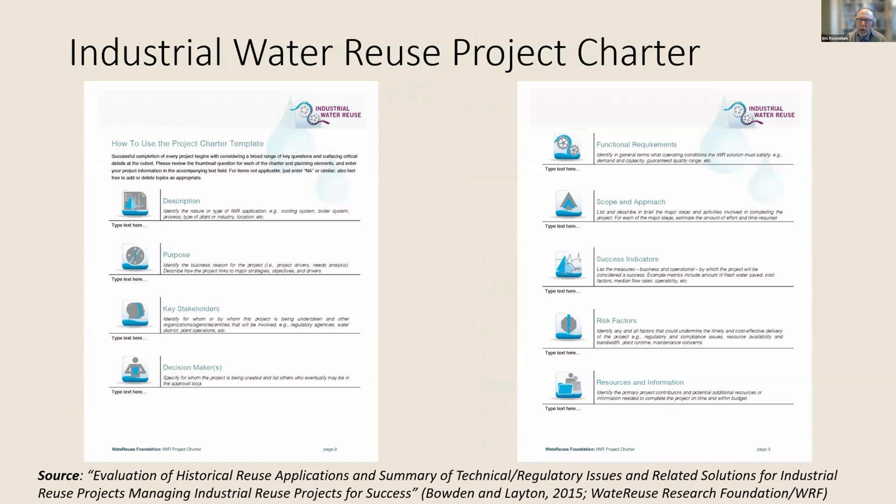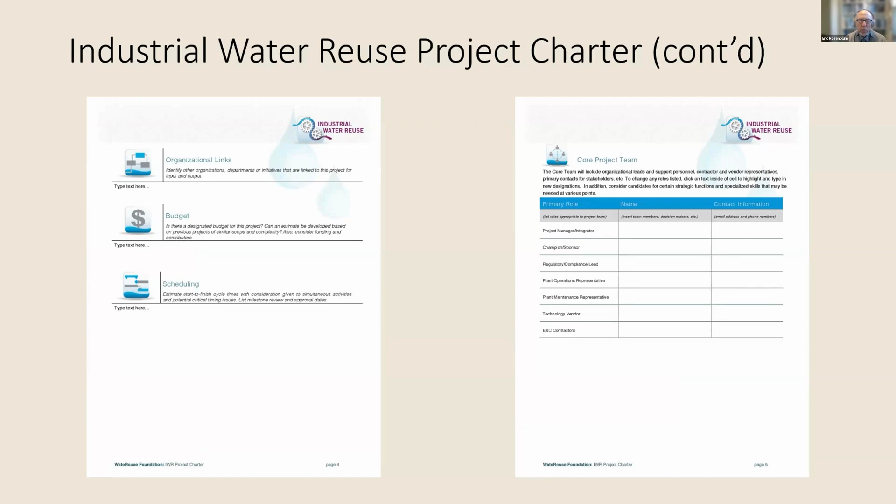I know someone mentioned the West Basin, where they have regular meetings between the customers and the utility to iron out any issues that come up, but really to identify the stakeholders, the decision makers, be clear about the risks, and focus on the budgets and the schedules in a way that may be more aggressive than the utilities are used to. And everybody kind of signs on to this to agree that this is in fact what's going to be done. It's not a substitute for the trust that develops between the parties, but it can help document some of the decisions.

So that's kind of a snapshot of how utilities can be better partners to companies to help make this happen. I'd be remiss if I didn't acknowledge that with respect to brand equity, really the cheapest things, the award programs, can sometimes be the most useful. Water reuse on a national level has a global industrial water reuse champion award, and even local communities often have green business programs that can be useful to helping a company understand their relationship with the society and how it can benefit them to be recognized for the work they do in water management.

Last but not least, we're doing a sequel to the book called A Guide to Responsible Industrial Water Use in a Changing Climate. And we look at 7 guidelines that companies will follow who wish to use water more responsibly, beginning with treasuring water and recognizing that they have to work towards measurable goals with other people to share responsibility, and ultimately to commit to regeneration, because we don't want to just do things less poorly than we've done in the past. We really want to do things better.

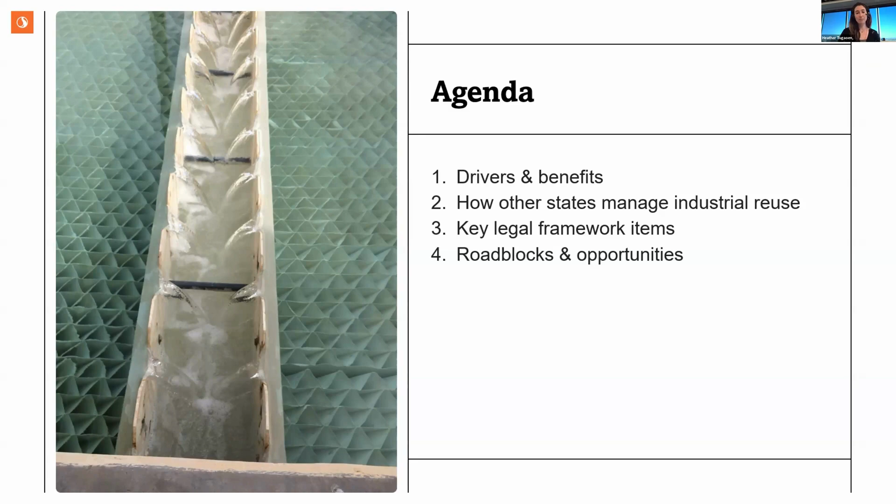So we'll talk about how other states are managing industrial reuse and then some of the key legal framework items. So we've been looking into what's on the books in Indiana and then what kind of carry forward items there are. So a few roadblocks and a few opportunities there as well. Okay, so what are the drivers? So obviously there's large scale development going in across the Midwest. There's historical, huge scale industry, manufacturing. There's a whole list of things that we'll talk through a little bit.

Trying to come up with better interagency and regional thought processes, right? So it's not about me and my watershed and my one well. It's now about how am I taking water from other places and then maybe restoring that back, or am I trying to offset some of that water lost to those freshwater resources, right? Optimizing the use of the water. So again, once through to many times through many different uses, right? The uses can evolve as that water is used in different ways.

Obviously, we're not going to drink straight from the pipe that's coming out of the toilet, but we have plenty of technology and different ways that we can framework all of those different pieces together, right? And then how does that translate into actually having regs on the books that this can be done in a way that stewards the environment and stewards public health as well. So what is our business case, right, for industrial reuse? And we've talked about a lot of these. Water security is a huge one.

So if you're in an area that doesn't have any other supply but groundwater, we know that groundwater is ultimately a renewable, slightly, water supply, but you ultimately have a finite amount of water in the ground. And if you're not replenishing that and restoring that, eventually you will come up with empty wells. It reduces infrastructure costs. So I put an asterisk there because that can be misleading in some ways, right? So there's offsetting certain infrastructure costs. There will be infrastructure required and needs to be built in order to implement these sorts of systems.

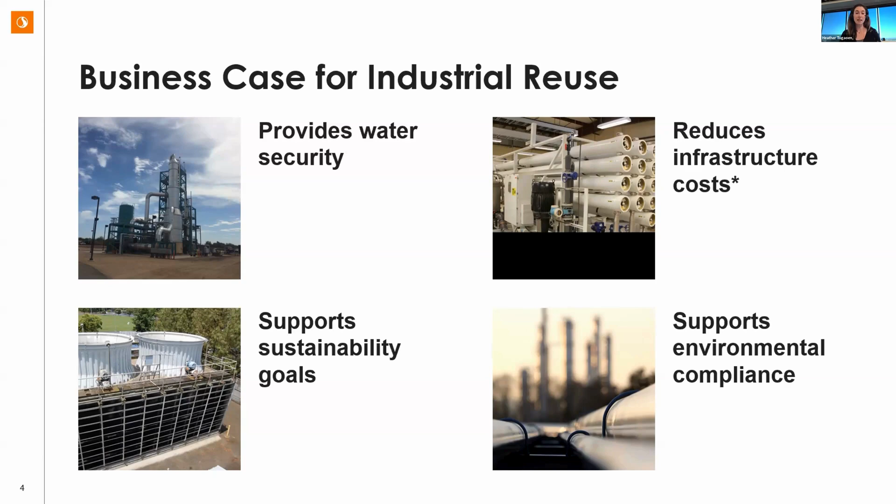So I think what Eric referenced in terms of the different levels of people who are excited about this versus the maybe more bad actors. In general, reuse can support environmental compliance because you will be at least lessening the amount of that water that's discharged into public water bodies that has not had higher levels of treatment, right? So kind of going the step beyond those just baseline NPDES permit requirements. So what are the different ways? There's going to be a few different lists we kind of go through.

So I live in the Phoenix Metro. We have the largest nuclear generating station in the country, potentially in the world, that is inland, right? We don't have a source of water. So they're using 100% secondary treated effluent from the wastewater plant in the middle of the city of Phoenix that sends out about 60 MGD to this cooling operation down at the nuclear generating station. And that is every day people flush their toilets. Every day there's a guarantee.

So the plant is treating about 140 MGD. They're sending 60 to the nuclear generating station. And again, that's for cooling. They're not using it through a one-pass system. They have multiple cycles of concentration, so they're getting multiple reuses of that reused water, right? So kind of stepping through those different pieces there.

Wash down and rinsing, we've talked about some of these other ones. Obviously, contact versus non-contact is a huge deal if we're using domestic sewage mixed wastewater. If it's going to be purely process water, then you can step that down a little bit differently. And source separation is really huge if you want to optimize your water reuse in an industry setting. So you can separate all of the kitchen and restroom waste to the domestic treatment area versus having the process water separated. So you have a lot less treatment required than when it's commingled. So again, forward thinking, putting that in on the front end.

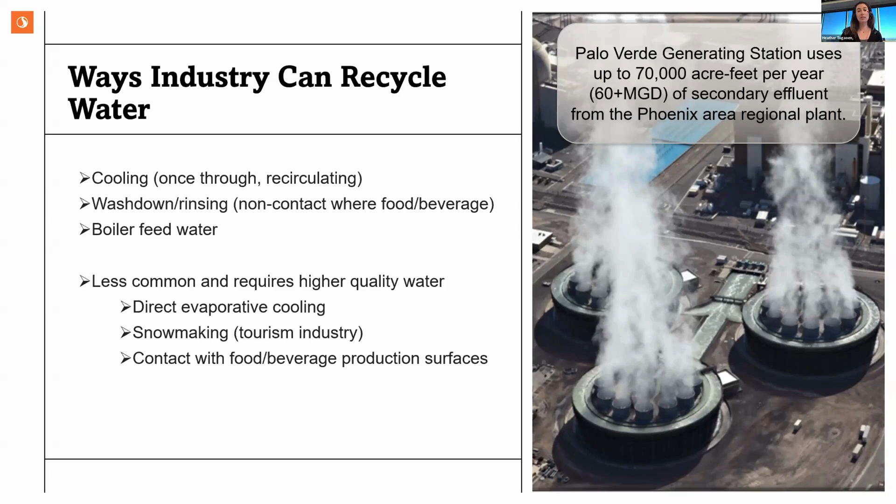We in Arizona use it for snowmaking. So if you're out and about in northern Arizona, you can ski a slope that is made of reclaimed water. And again, it just varies on what the level of public exposure is, how we're going to treat that on the treatment side of things.

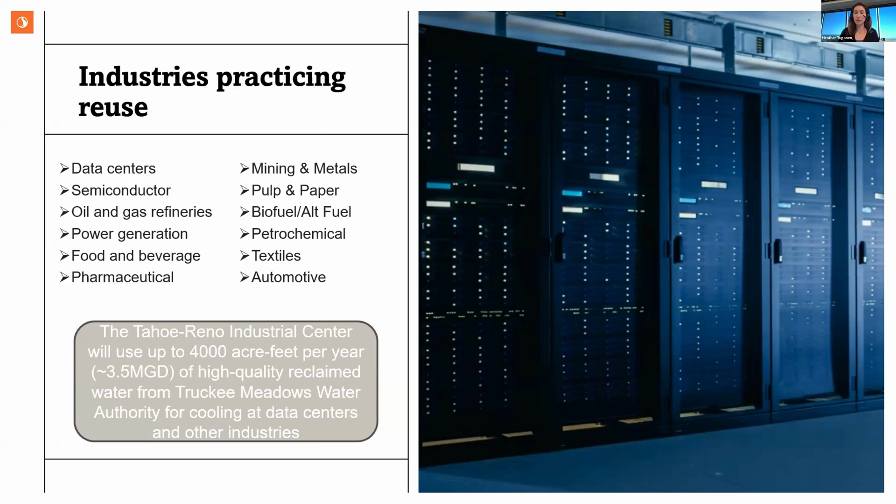So all of these different industries are currently practicing reuse across the country. Within different states, there are regulations associated with what this looks like, depending on what the influent water is. Indiana is still in the process of moving in that direction, so we're looking forward to having more guardrails. But again, data center, semiconductor, all of the major water hogs are going to be on that list of entities that really are trying to implement ways of reusing water, whether internally to their own processes or taking reclaimed effluent from municipal wastewater treatment, like Prakash was saying earlier.

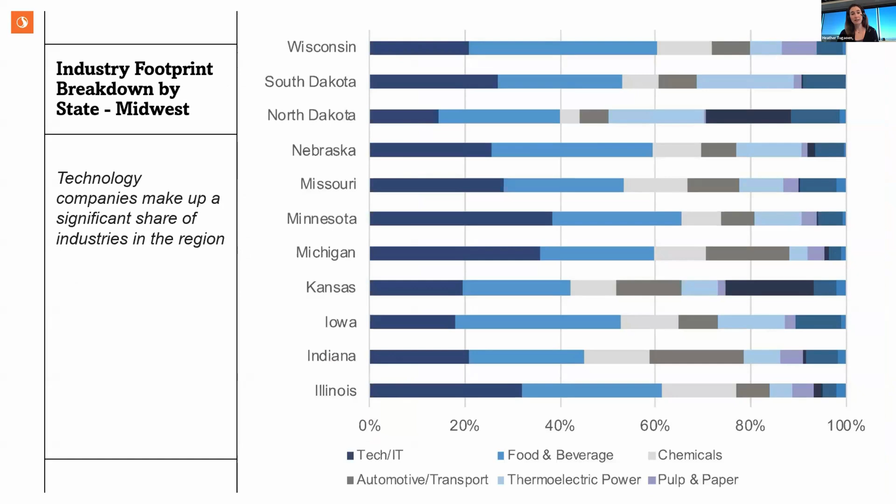So in terms of the footprint, across the Midwest, and this is from the WateReuse Association, this is the breakdown of different industries. And so this is how many different possible users are available across that Midwestern and Great Lakes region.

So in terms of what are the limitations, we'll step through this. This is where we get into more of the regulatory piece. We have a natural system, we take raw water out of it, whether that's groundwater or surface water, take it to a water treatment plant, then send it out to the industrial entity. They use it and will typically discharge it after pre-treating it. So they have to do some sort of pre-treatment before it can go to a wastewater treatment plant.

And that's part of that Pollution Prevention Act, that PPA, before it goes to a municipal plant. And then typically that NPDES cycle carries us back to a natural system. In order to implement, just policy-wise, we need some sort of catch to have a legitimate permit, to say what is acceptable quality for me to send back to industry.

And again, that varies state to state. We'll talk through some of the specific parameters that we typically look at on the next slide for different states, as well as potential opportunity here to have a permit going between different industrial entities.

So my wastewater effluent could be used, right? If I'm a pharmaceutical manufacturer, I can then use that wastewater instead of sending it to the municipal plant or sending it to a river. I could send that to cooling tower A at a different industry, and it requires the permitting and legal agreements in order to do that. So I think it's setting up the framework that we can take that water cycle and create a loop instead of all of that water being discharged to the natural system.

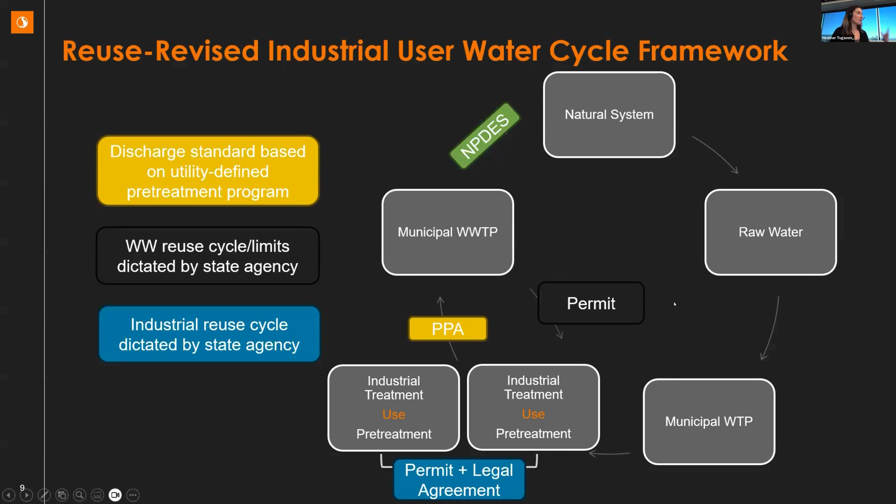Again, needing to maintain natural systems. And I think that was one of the questions as well. So factoring all of that in, obviously there's EPA and state EPA related items that will be stewarding that water well.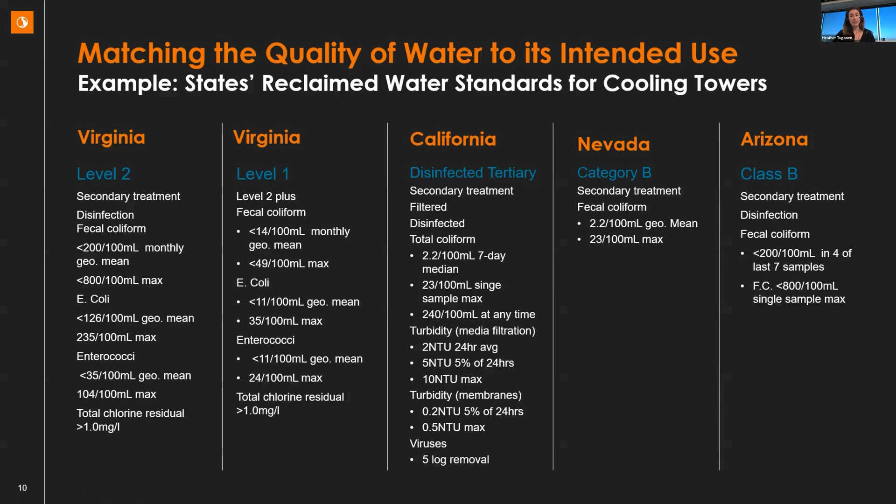And then Nevada and Arizona both allow Class B. We also have category A plus, and Class A plus, and A above that for both Nevada and Arizona. So again, this is the minimum required standard, and you can kind of go above and beyond that with the domestic effluent that's treated.

So I guess in terms of what's needed is first establishing a regulatory authority. At the state level, there needs to be authority to have responsibility for permitting, monitoring, compliance. On the local level, needing to have authority for that individual utility that's going to be receiving whatever wastewater flow is coming back, and that could be cooling tower blowdown water, having pre-treatment on that adequately to protect their wastewater treatment plant.

So again, keeping that cycle controlled and at least managing those relationships, always emphasizing that stewardship is the priority. So number one job of any environmental agency, as well as any environmental engineering people, is to protect health of humans and the environment, conservation and anti-degradation. So that's the mandate from the Clean Water Act, the Safe Drinking Water Act, all of the different pieces that we're trying to protect all of the bodies of water around us.

And then trying to keep, and this is maybe more of my personal push here, but allowing industrial users and utilities to stay in their respective lanes. So you have water that you're creating fit for purpose. Do I need potable water going into a cooling tower? No, I don't. Do I need high enough quality water that I can get high numbers of cycles of concentration on my cooling tower? Yes. Am I providing water that's a certain quality that once it goes into industrial entity A, they are going to treat it anyways to a much higher standard for whatever process they're going to be using? And that takes the responsibility off of the utility onto the industry.

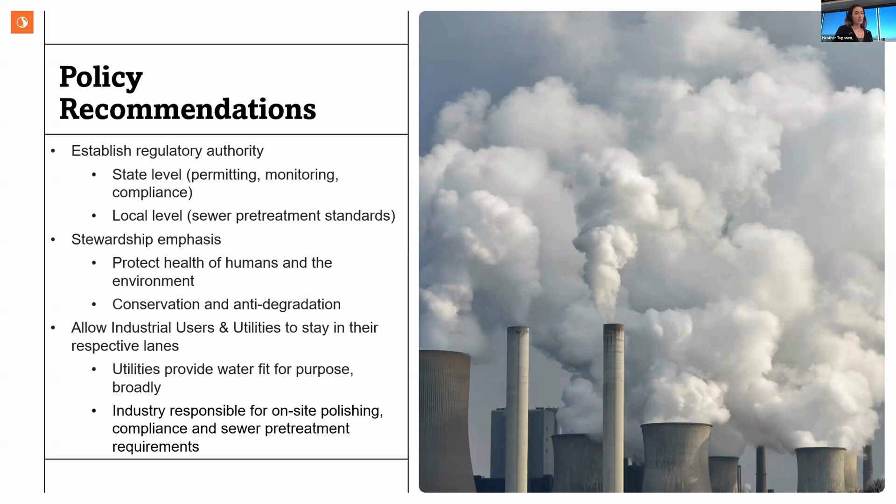So allowing them to do their fit for purpose interior treatment, as well as some of those different wastewater processes, kind of what Nichole was getting at. So again, they're responsible for on-site polishing. There's a minimum standard of water that's being delivered to them and keeping up with that. So another piece of that is classifying my reclaimed water. I can't just say everyone gets whatever comes out of the wastewater plant.

So again, key parameters, and Chip talked a little bit about this as well, but different categories mean different things. You're going from lowest quality to highest quality - type 1, A plus, disinfected tertiary, right? It just depends on where you are, what they call it. But basically, certain treatment technologies may be required. We might need nitrogen treatment, we might need phosphorus treatment. On the wastewater side, definitely disinfection, as well as some amount of turbidity management. So those are kind of your key things.

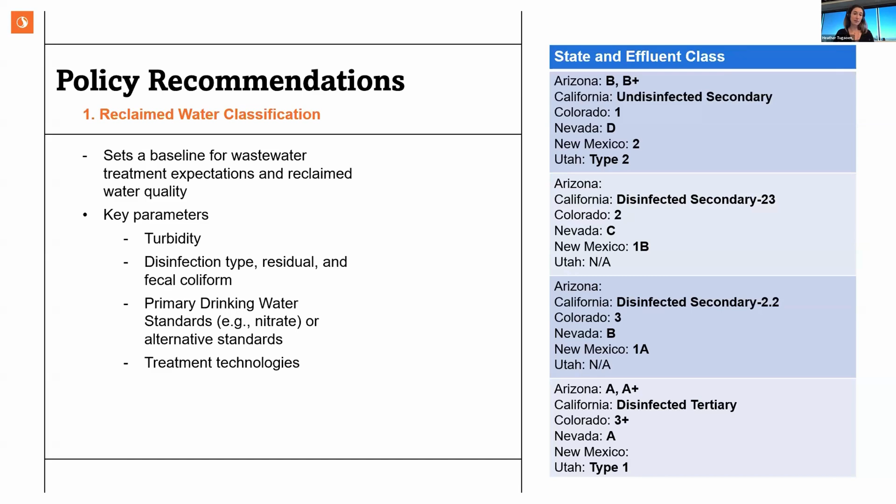And again, at the state level, putting it out there - this is what we need as a baseline. And then whatever is negotiated between those different entities, or between the state and the utility, can then be what's taken forward. So how do we then take this?

So this is kind of the side by side here. We have the state classes of effluent, and then what can we actually use them for? Restricted access versus open access - if I'm going to be in contact with other employees or with the public, we're not going to be using this. So this is how in these states it's categorized.

So firefighting - do I need sprinklers in my giant industrial building? We don't have to use potable water to do firefighting. A lot of states use non-potable water. Like a wastewater plant has a whole supply of non-potable water that they can use as fire protection on site, as long as it's treated well enough.

But again, thinking through these different pieces - do I need wash down water? Is it process water that's going into a very fine, highly tuned system, for a semiconductor process or pharmaceuticals, where we want that to be ultra pure water? And so maybe there's different stage gating on what can be used where, and that goes into how you categorize.

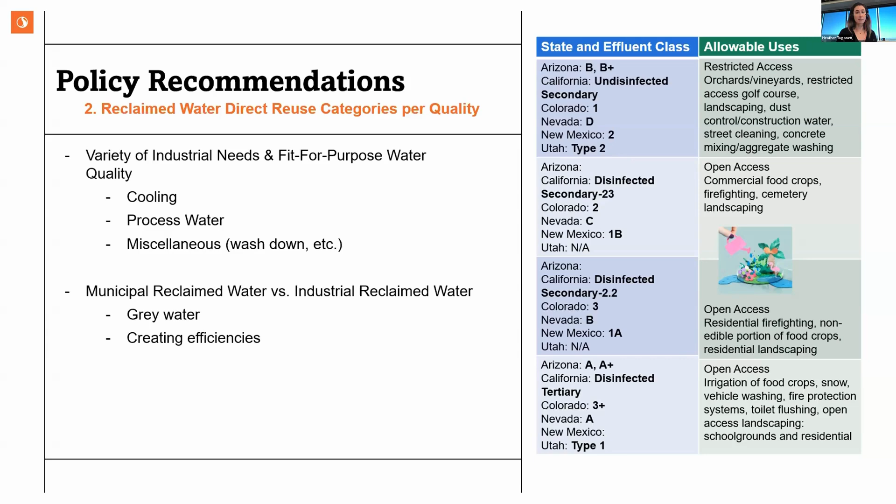So a few success stories. I know we're low on available time left, so I'll be brief, but I know Intel was mentioned earlier - I will hype them up on the Chandler side of things. They've been a huge partner of the city of Chandler for the last 15 years.

They have a brine reduction facility. They're paying into the wastewater side of things. They're taking reclaimed water as part of their source water. And so that's part of their like 3.3 billion gallons of water saved from Chandler's plant, only Chandler, in 2022. So that's a huge savings both to the city needing to find more water resources to fuel this large fab, producing semiconductor. And they're up to a platinum level of sustainable, like Alliance for Water Stewardship - first semiconductor company to do that. And that's because of their Intel Ocotillo brine facility plant.

So again, Loudoun County is one closer in Virginia. Obviously I talked about Palo Verde, and then our golf courses have actually partnered - so this is heavy industry, but more of a different sort of commercial, because the water is so saline in the Phoenix Metro. City of Scottsdale, and an amalgamation of very high-end golf courses, including PGA playable golf courses, now use highly treated effluent so that they can not kill the grass. So they paid into - like the golf courses paid in - to have RO at the wastewater plant so that they don't have high sodium, because it doesn't keep the grass green. No one wants brown golf greens.

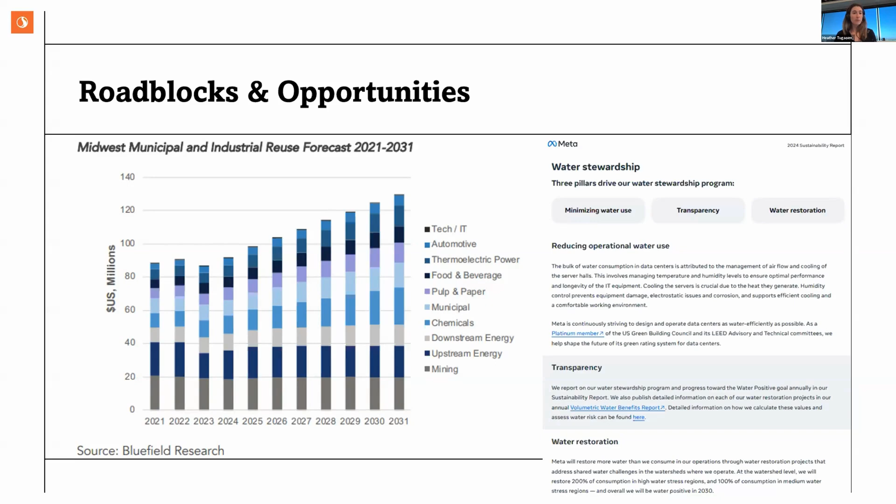Bluefield Research put out a report on the Midwest specifically, so you can find that. I can always drop it in the chat as well. But you can see cumulatively, by the 2030s, we're looking at significant sums of money that can potentially be saved and reinvested elsewhere if we're starting to use municipal and industrial reuse across the Midwestern region.

So with that, any questions? Happy to answer. Rob did contribute to these slides, even though he is not present. So if you want to email him, I totally understand, or you can reach out to me. But thank you. Thanks so much, Heather.